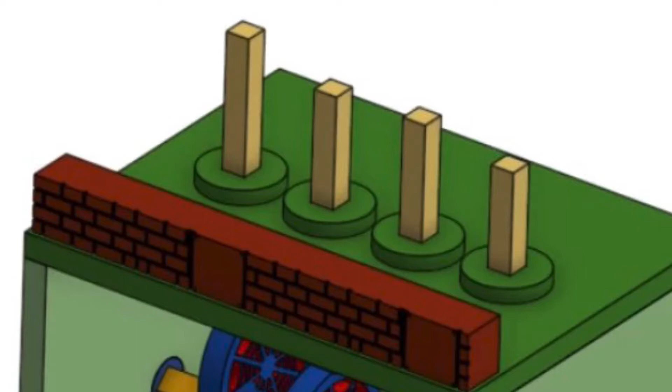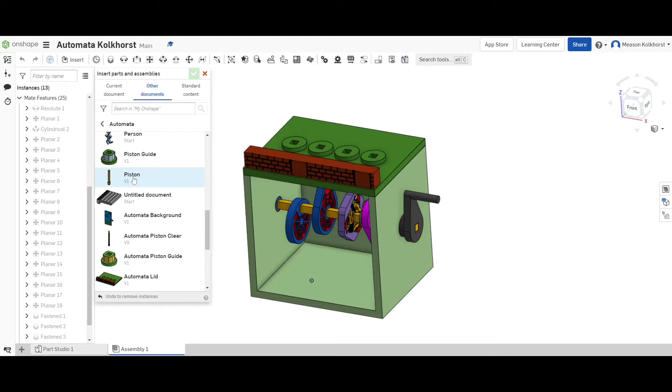Inserting the pistons. Here we go. Needed to go find my pistons. Oh, there it is. Put this guy out here. We are going to need 4 of them, so I'm going to put all 4 of them out to begin with.

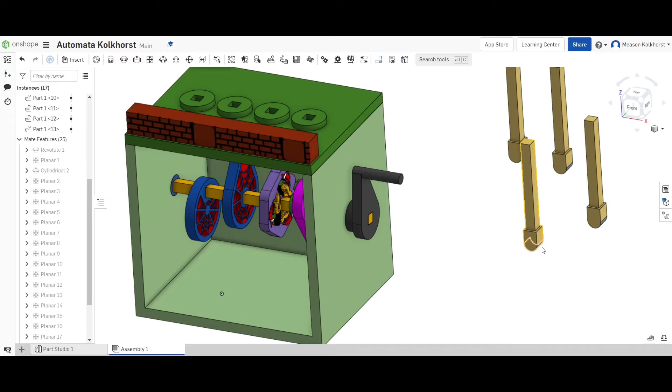Green check mark. Now here's the problem: this curve at the bottom needs to be facing the same direction as the curve on the cams, so I have to rotate them.

To do that, I'm going to arrow up so I can see what I'm doing. If you click on any one of them, it brings up some arrows. I'm going to use the one showing the x-axis, grab it, and move it until it says 90 degrees. Then I can just click off.

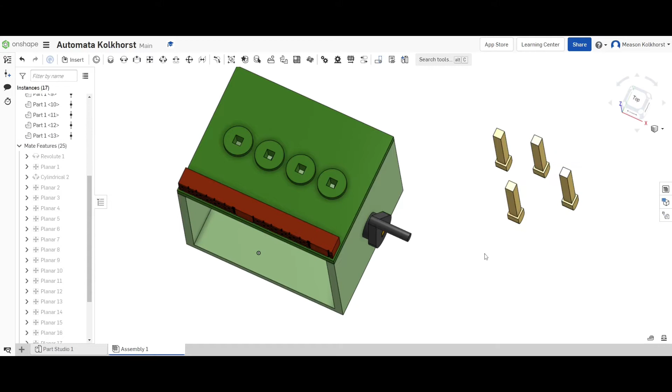Do the same with the next one: rotate it so it says 90 degrees, then click off. Next, rotate it so it says 90 degrees, click off. And the last one, rotate it so it says 90 degrees, off. The reason for that is it makes it easier to line everything up. If you don't do that to begin with, it's harder later when you try to line everything up, and you'll have to do multiple steps instead of just one.

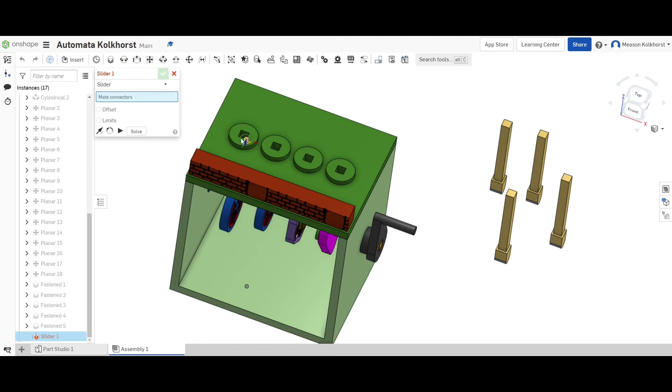Okay, we are now going to use the slider mate. This is going to allow this piston to slide in and out of our little square hole here. So, slider mate, I'm going to zoom in and find the exact center of our little square on the piston guide.

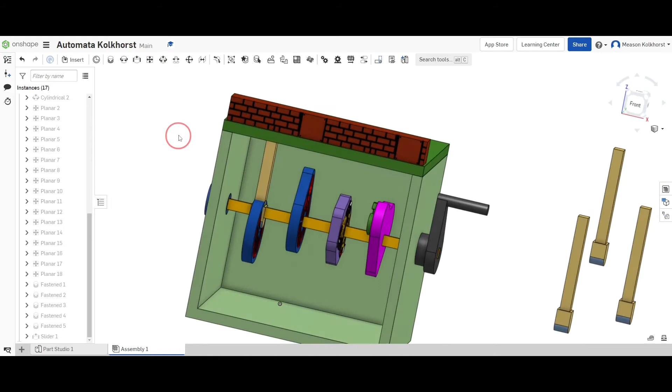Click. Now I'm going to zoom out and find the exact center of the top of our piston. Click, and it's lined up in place. Green check mark. You'll notice it's inside the shape here, but this is a computer, so it doesn't matter at this moment. When I grab it and move it, it only moves up and down. It can't move left and right or forward and backward. It's locked in place, only sliding up and down.

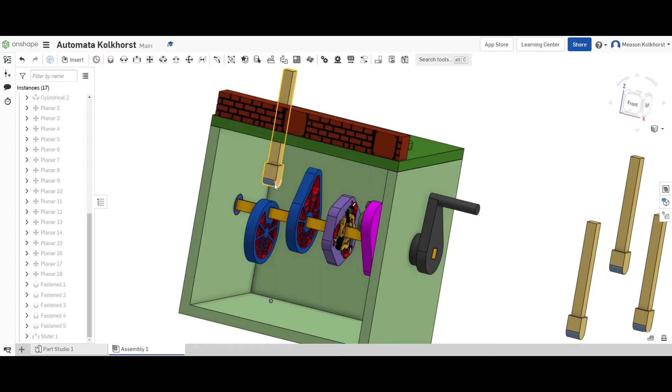The next one, and here's our powerful tool, is the tangent tool. The tangent tool allows this curve of our piston to touch this curve of our cam, and together they rotate. Every time this rotates, the piston slides up and down as the cam moves around.

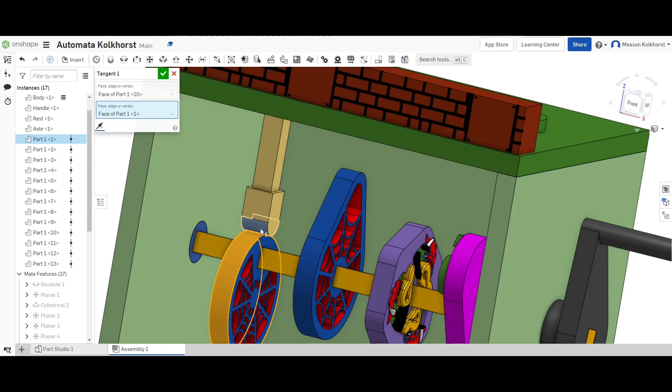So, tangent, I'm going to choose - and you need to make sure you're not choosing an edge or the flat, we want the curve. Click. I'm going to come down here and choose this surface. Click. You'll notice they didn't snap together and everything on the side turned red. So what we need to do is flip our arrow. Flip, and as soon as you do that, everything goes back to gray. They bump together, green check mark.

And now when I turn the axle, the piston moves up and down. We're going to do the same for all 3 of these.

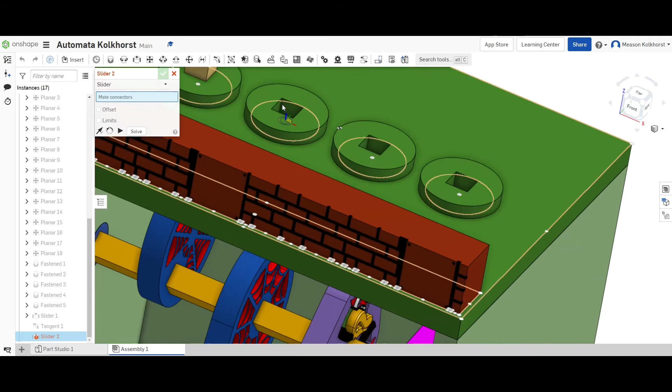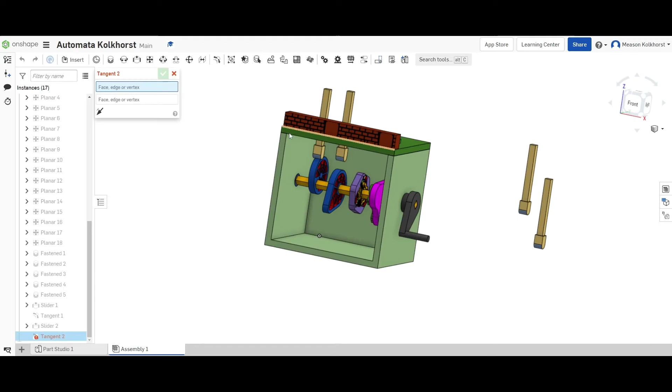So, slider mate, turn it so I can see what I'm doing. Zoom in, we want the top center of the square. Zoom out, we want the top center of the piston. Click, green check mark. We need to grab it and move it up, otherwise it gets confused. Then I'm going to choose tangent, zoom in, choose my curve, and this time it already locked into place - it didn't need to be rotated. Everybody's gray, not red. Green check mark. Two more to go.

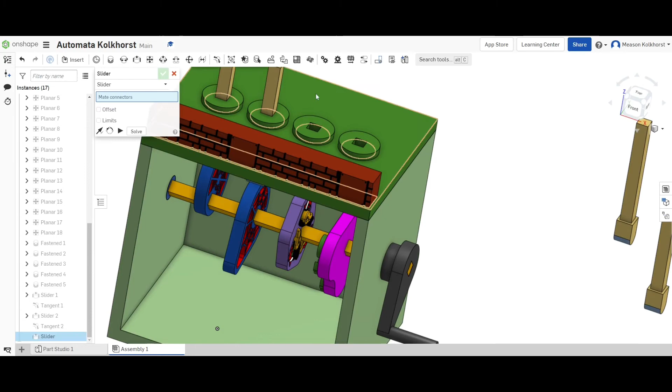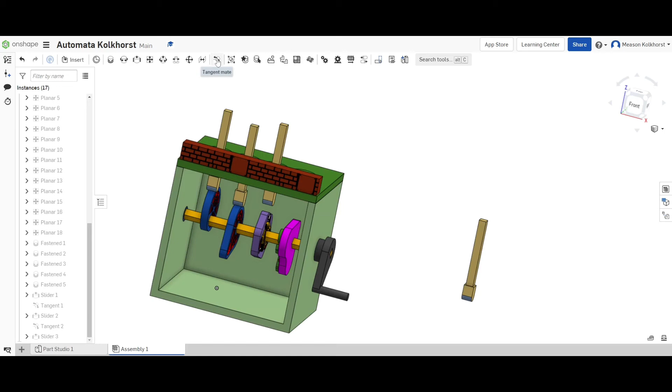Slider mate, zoom in so I can see what I'm doing. Center of the square. Zoom out, center of the top of the piston. Green check mark. Pull it up so it's outside of it. Tangent, zoom in, choose my curve. Didn't have to rotate it. We're fine. Green check mark.

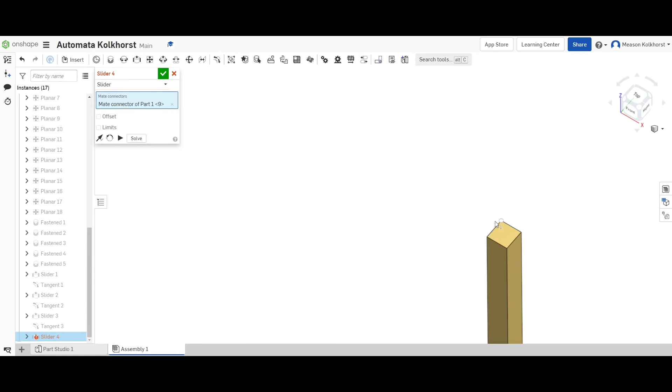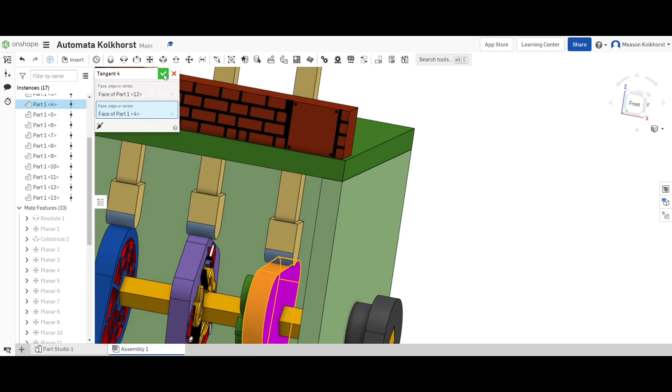Last one. Slider mate. Center of the guide. Center of the top of the piston. Green check mark. Pull it up so I can see what I'm doing. Tangent. Click, click, bumped into place. Green check mark. Remember, if they don't bump into place immediately and everything turns red, all you have to do is change the direction of the arrow.

So I have my tangent. All you'd have to do is change the direction of the arrow. If it lines up and everything's red, that just means the arrow is pointing the wrong direction.

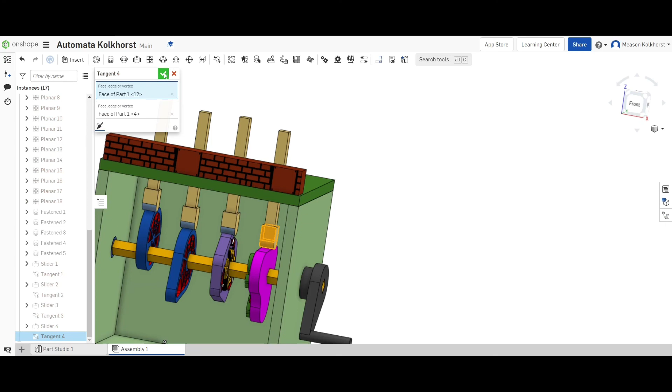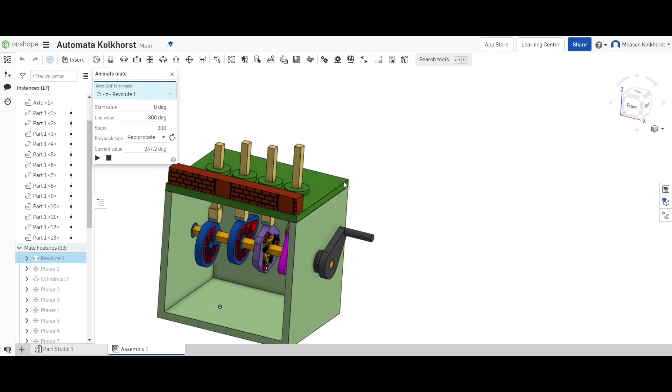So there you go. When I come back to my Revolute number 1, two-finger click, animate, play - and everybody is moving. Look at that, everybody's moving just exactly the way I want it to be. And there you go. Take a screenshot of that, make sure I can see all the pieces, that they're all lined up. Everybody's locked in place. Good luck.